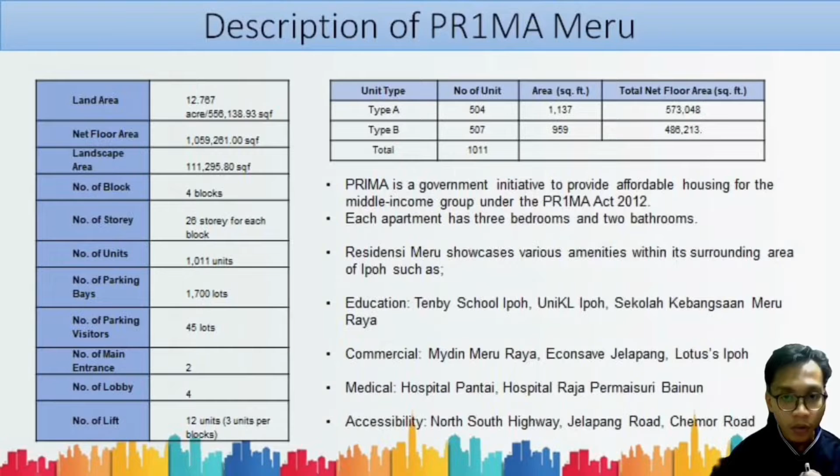Moving on to the services and facilities available at Prima Meru: there are 7 sorts of services provided, such as property management services operated by Intraharta Consultants Sdn Bhd to take care of every aspect of repairs and maintenance of the building. Tafadhal Securities Sdn Bhd provides security services to tenants to ensure the safety of occupants and the apartment. Essential cleaning services are managed by Sinar Jaya Enterprise.

Lift maintenance services run by Sigma Elevator (M) Sdn Bhd guarantee that elevators around the residence function effectively. Water Shopee Ipoh Central Company operates swimming pool services to guarantee the pool's water quality is at a safe level. WKL Plumbing and Construction Engineering Sdn Bhd provides plumbing system maintenance services, and the last service is barrier, gate, and access card services by Wincom Trade and Services Company.

There are 8 types of common facilities provided at Prima Meru, including the guardhouse, placed at the front and back entrance, designed to enable the security office to function at its best; the surau for residents to pray; and the community hall, which residents may use for any types of functions such as weddings.

Aside from that, Prima Meru has nurseries and kindergartens where residents can send their children to learn and grow. Children in Prima Meru can also play at the playground provided at the apartment. Residents may utilize the swimming pool and gym for recreation purposes, and there is also a koperasi where residents can buy goods without having to leave the neighborhood or the apartment.

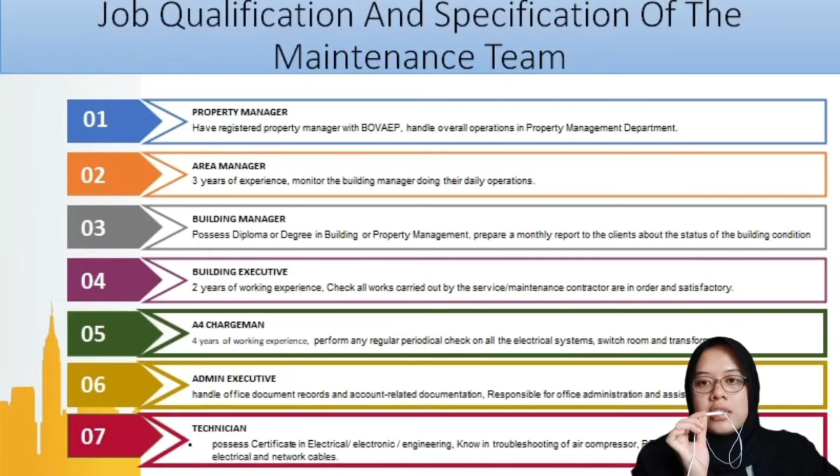The building executive is to check all work carried out by the service and maintenance teams contractor in order to be satisfactory. Fifth is the A4 chargeman qualification, which requires 4 years of working experience as an A4 chargeman. They need to perform regular periodical checks on the electrical systems, switch room, and the transformers.

Next is execution of the maintenance program by District Property Consultant Sdn Bhd. When it comes to the maintenance program, there will be in-source and outsource work, with short-term, long-term, and medium-term schedules. As we can see in the table, for outsource work, the maintenance program includes servicing the lift, water supply system, general lighting and electrical appliances, sewerage, piping and sanitary. Most of the program routine is monthly.

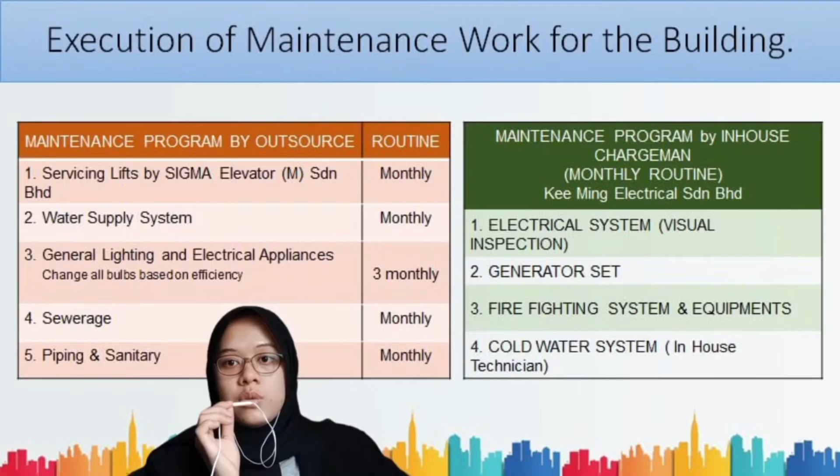For servicing the lift, the work is outsourced to Sigma Elevators Sdn Bhd. The second table is the maintenance program by in-house chargeman, which is also a monthly routine, carried out by Kee Ming Electrical Sdn Bhd. This covers the electrical system, including visual inspection, the generator set, firefighting system and equipment, and cold water system.

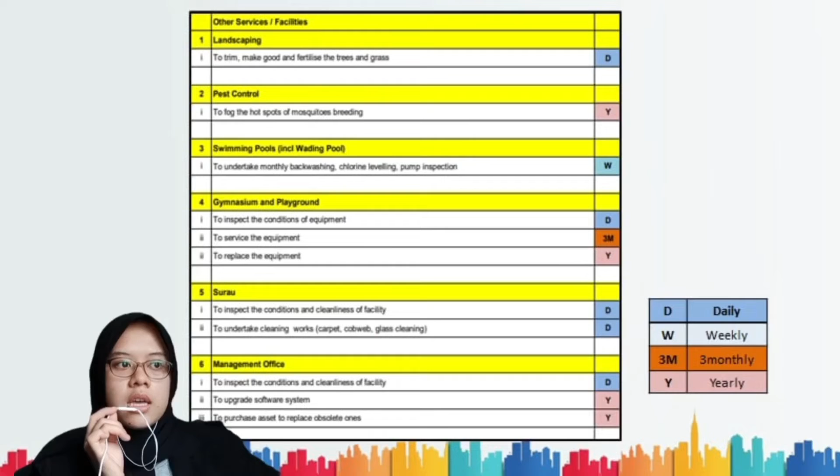As for the maintenance program for facilities, there are nine places to focus on: landscaping, pest control, swimming pools, gymnasium and playgrounds, surau, management office, kindergarten and nursery, show units, and the multipurpose hall. These places are involved with short term and medium term plans. Usually for trimming, undertaking cleanings and inspection, there will be daily and weekly routines.

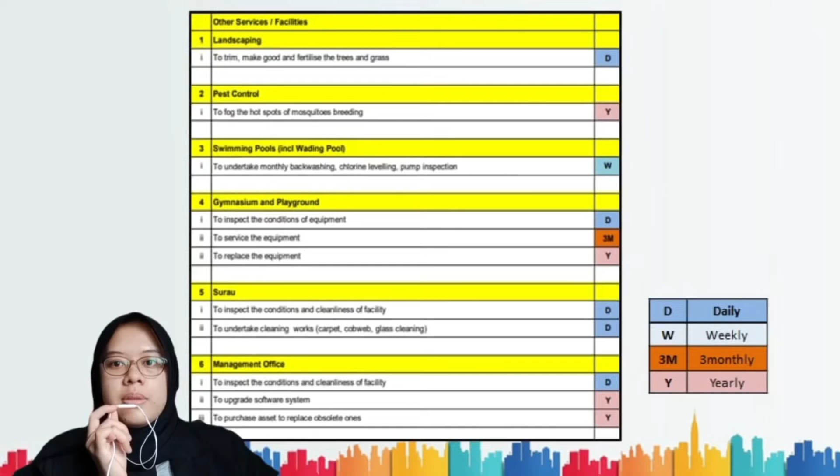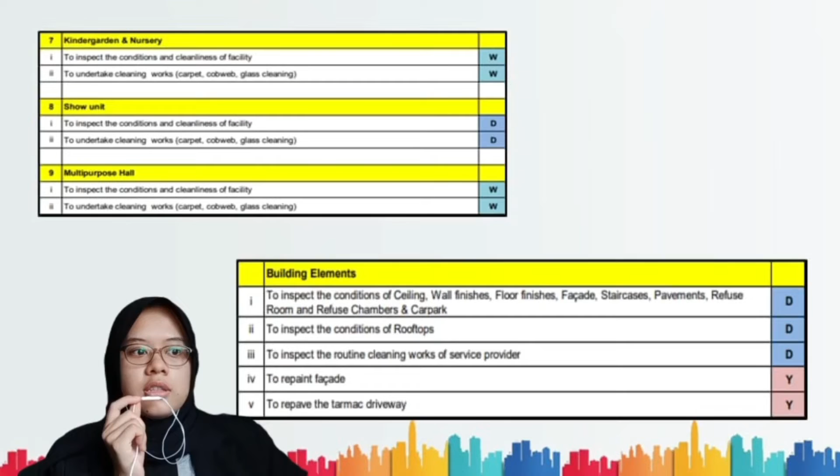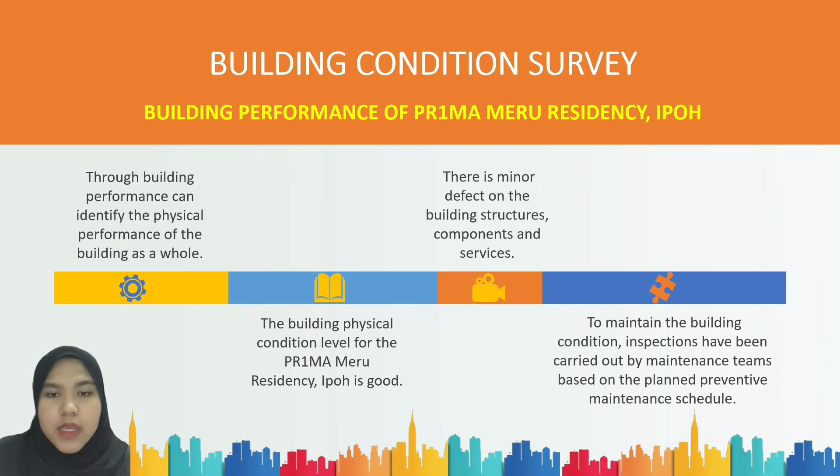Next is the building defects. What is a building defect? It can be identified as deficiencies needed to complete something, along with imperfections and mistakes. Defects may be caused by mistakes during construction work, use of raw materials, and design errors by the architect. Building maintenance should be carried out by the maintenance teams to preserve the value of the building.

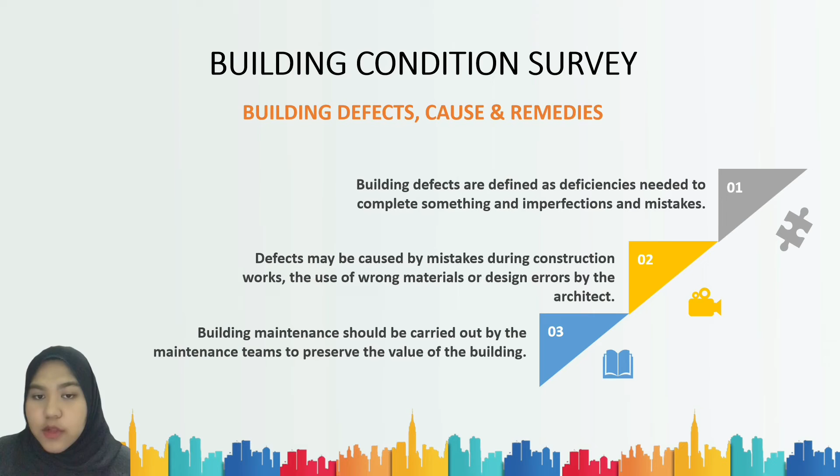Next is building defects, causes and remedies for the components or structures of the building. First is plant growth, where plants grow at the yard section, caused by water reservoirs where the water comes from rainwater. The person in charge should do the cleaning work and apply chemicals that will kill the plant growth.

Next is moss growth, where there is an occurrence of green or black discoloration on the walls, caused by the presence of moisture on the wall. The person in charge should clean the wall using a pressure water jet and treat the walls using soap-based product to maintain cleanliness. Next is grass growing between the joints of bricks, caused by the presence of high humidity in the area.

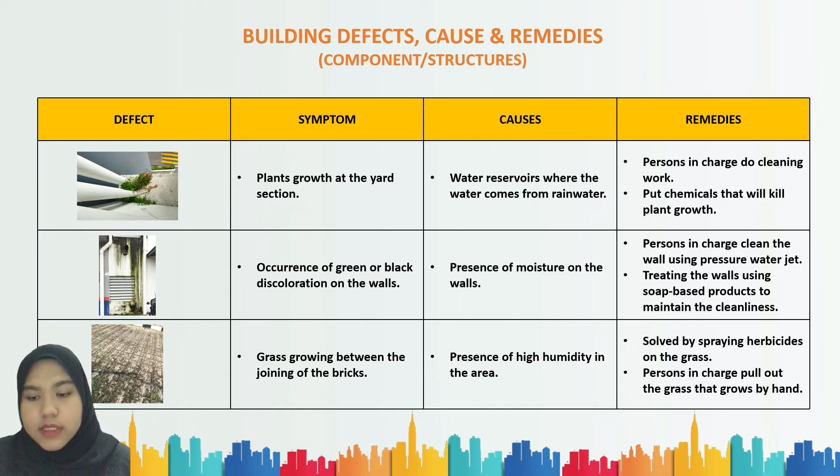By spraying herbicides on the grass, and also the person in charge should pull out the grass by their own hands.

On to the next defect, which is a window defect, where there is a line of crack at the surface of the glass window. It is caused by the high pressure of the wind. So applying mixing epoxy to the crack area can reduce the defect.

Next is the door dirty. It is dusty and gives fuzzy views to the occupants. It is caused by poor maintenance of cleaning. So the person in charge needs to clean the door using good quality detergent.

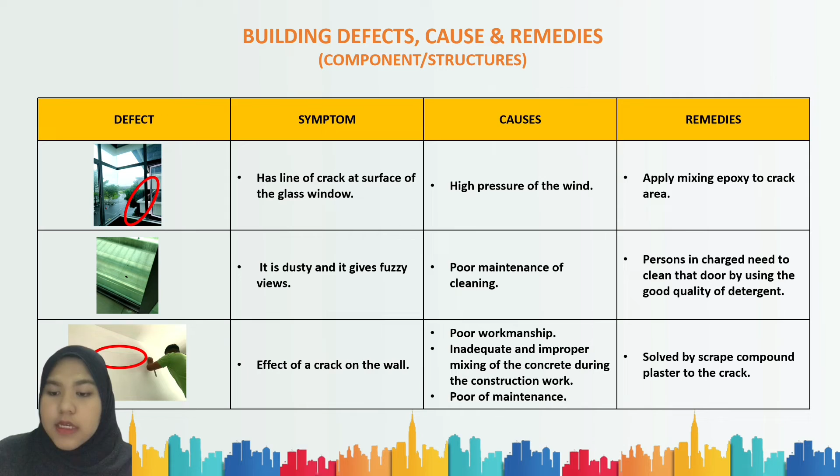Next is wall crack, where it shows the effect of a crack on the wall. It is caused by poor workmanship, inadequate and improper mixing of concrete during construction work, and also poor maintenance. Solving this by using scrape compound plaster on the crack will solve the defect.

Next is the paint defect, where the paint peels off from the column. It is caused by lack of quality of paint and also exposure to the weather. So the remedy is to repaint using waterproof paint.

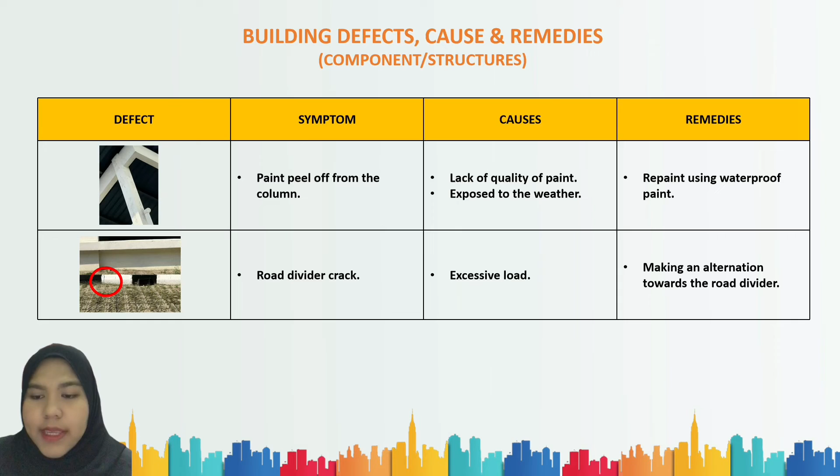Last, for the component structure building defect, is road divider crack, where it is caused by excessive load, and making an alteration to the road divider can solve the defect.

Next is defects, cause and remedies for the services. First is mechanical defect, which is the lift, where the lift and landing indicator were not functioning. This is because of mechanical failure. So periodic inspection should be carried out by the maintenance team to solve the problem.

Next is electrical services defect, where the switch became non-functional since there is no power. It is caused by the blown fuse or tripped circuit breaker. So the person in charge should replace the fuse or switch back on the circuit breaker.

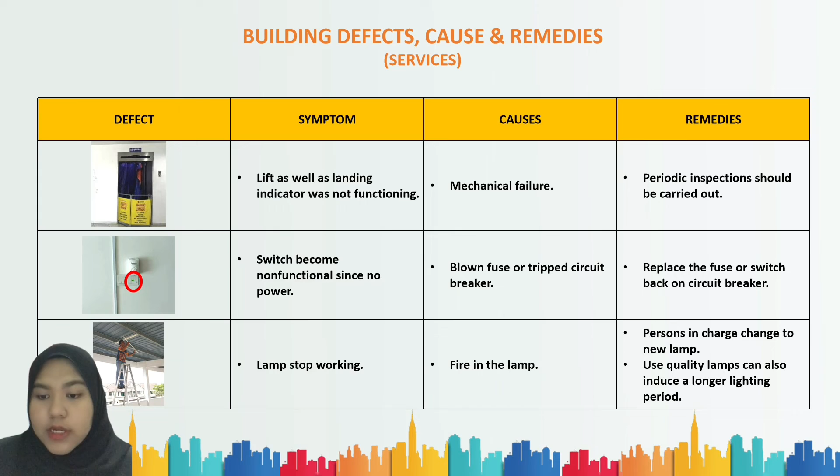Next is lighting defect, where the lamp stopped working because there is a fire in the lamp. So the person in charge should change to a new lamp and use a quality lamp so that it can provide a longer lighting period.

Next is the sewage system defect, where sewage is overflowing out of the manhole. This is because the manhole became clogged since there is cement in the manhole. So the remedy is the person in charge must remove the cement in the manhole.

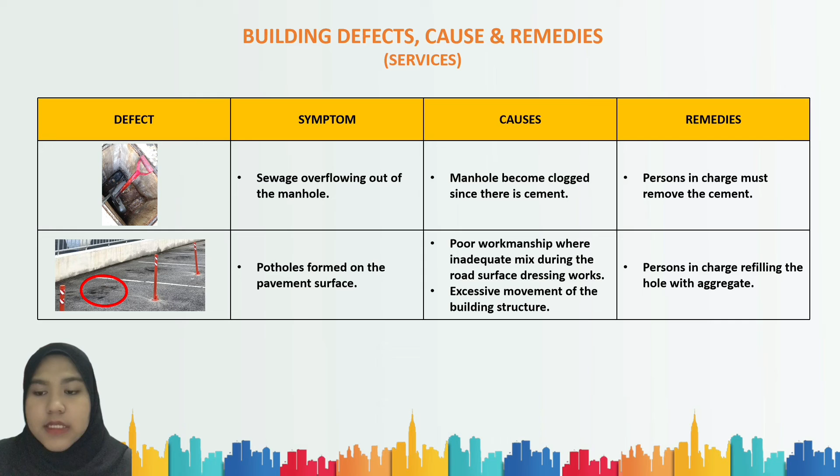Last but not least is the floor defect, where potholes form on the pavement surface. This is caused by poor workmanship, inadequate mix during the road surface dressing works, and also excessive movement of the building structure. However, the person in charge should refill the hole with aggregate.

Assalamualaikum warahmatullahi wabarakatuh. My name is Muhammad Izzat bin Syamsuddin, and now I will talk about developing the maintenance system for our Prima Meru. Firstly, one of the first steps we can take to develop the maintenance system is to use the computerized maintenance management system.

Known as CMMS, it is a software that helps manage assets, schedule maintenance, and track work orders. It also helps with resource and labor management, asset registry, work order management, materials and inventory management, reporting, analysis, and auditing. The benefit of CMMS includes asset visibility, workflow visibility, automation, and streamlined processes.

We can also upgrade this software into a mobile platform. One of the main advantages is that the software application can be used on a smartphone or tablet, so it can be used anywhere. The deployment and adoption of the application are much simpler than the old generation CMMS software I talked about before. This can allow the sharing of maintenance experience and problems, and facilitate and accelerate the resolution of difficulties between operators.

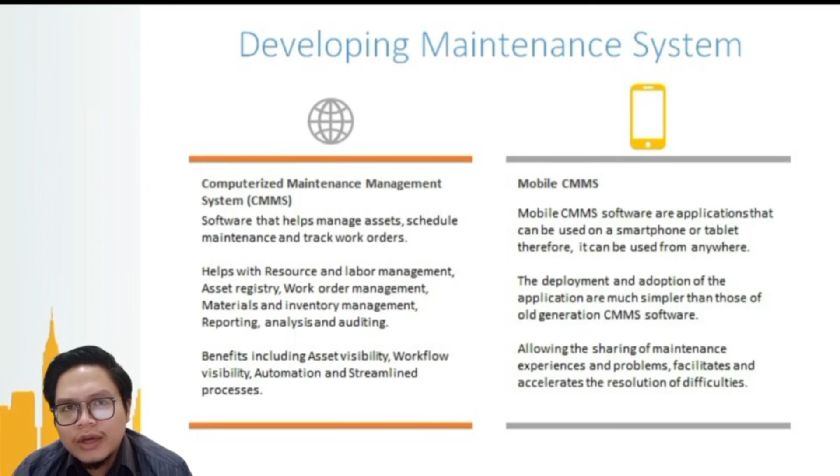Now, for the conclusion, there are many distinct roles that a property manager needs to be aware of, especially in the management of their subordinates. Maintenance application is crucial for smooth operation and execution, and the right application or software can also greatly impact the maintenance work done on Prima Meru.

This work has taught us the impact and value of such maintenance applications to an organization, in identifying and fixing building deficiencies. In particular, the computerized maintenance management system, or CMMS as I mentioned before, is software that centralizes maintenance data and streamlines maintenance operations. We have improved this program further by integrating it with a mobile platform or Android application since it is more effective and portable.

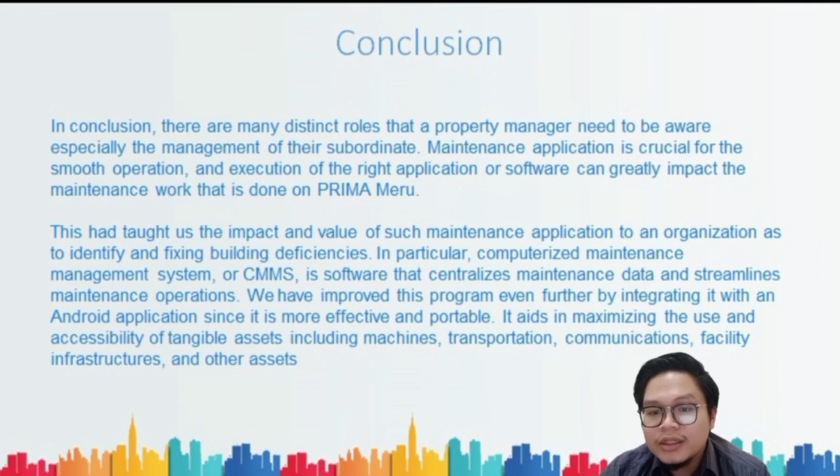It also aids in maximizing the use and accessibility of tangible assets such as machines, transportation, communications, facility infrastructure, and other assets. Okay, that's all from us. Thank you.